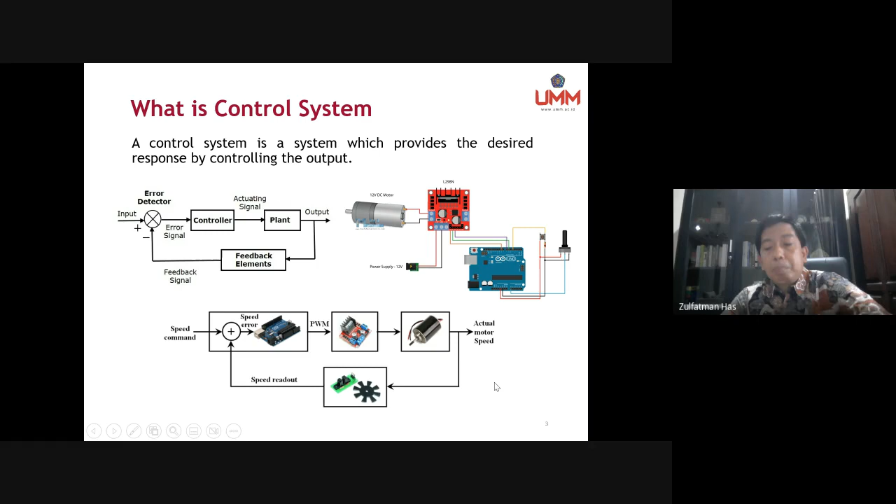And then where we put the controller, we put it inside the Arduino here, and then we can use any type of controller here to make the performance of the DC motors better and better, depending on our requirement. So okay, now after we understand the concept of the principle of the control system, maybe we can review the elements of the control system.

So the difference will be the error. We call it the actuating signal. So the actuating signal is a signal given to the controller to give an action. For example, if the error is high, the controller will push to give its best performance, and then when the error is smaller, the controller will work a little bit not as fast as before when the error was quite big.

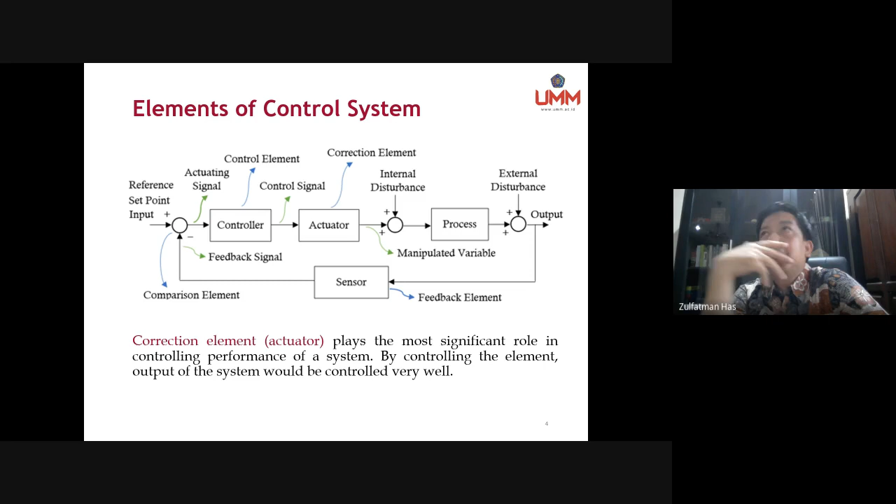For example, if we are trying to control temperature in a room, what is the correction element? The correction element is normally a motor that we put inside the room that controls the room, and the actuator can turn at maximum speed or proportionally change depending on the condition of the temperature. So the correction element will be active depending on the control signal. Meaning that we will give the maximum control signal when the error is maximum.

So the actuation given by the actuator will depend on the condition of the output. So in this concept of control system, we understand that the correction element plays the most significant role in controlling the performance of a system. Meaning that in any application, actually we control the actuator first before we control all the process.

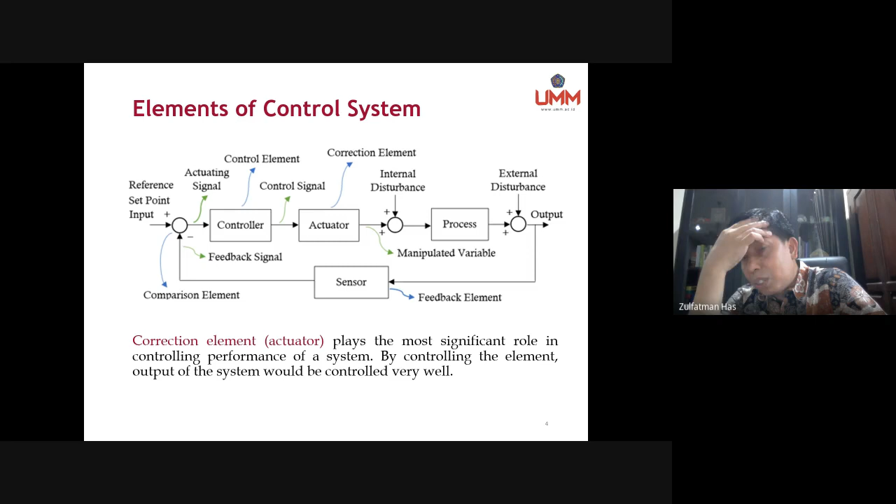So in any application, we can check on the internet, we can see any application for control systems. Normally we control the actuator, we control the correction element, because the correction element is the element that can influence the process, depending on the output of the process. So if you want to design a control system, mostly we will control the actuator to control all the process of the system.

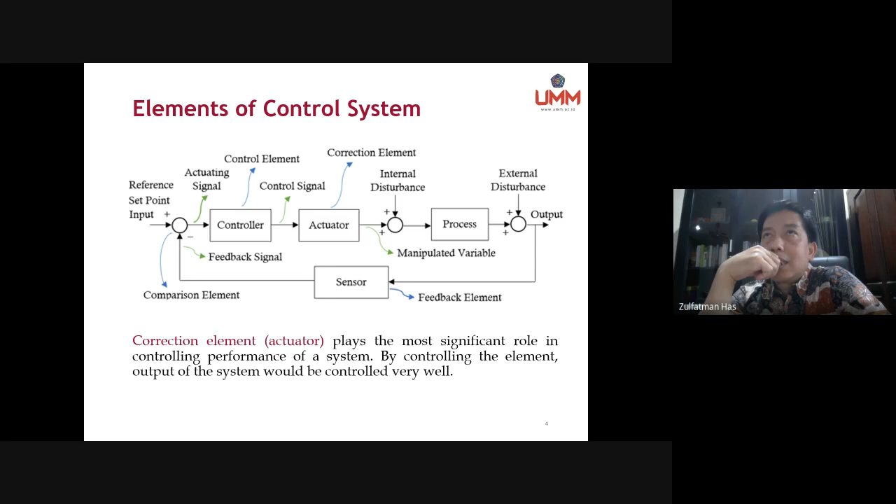Here also we can find internal disturbance, which normally exists in the system, and also external disturbance. For example, if we control the temperature of a room, the temperature in the room will be influenced by the outside temperature, meaning that the outside temperature is an external disturbance.

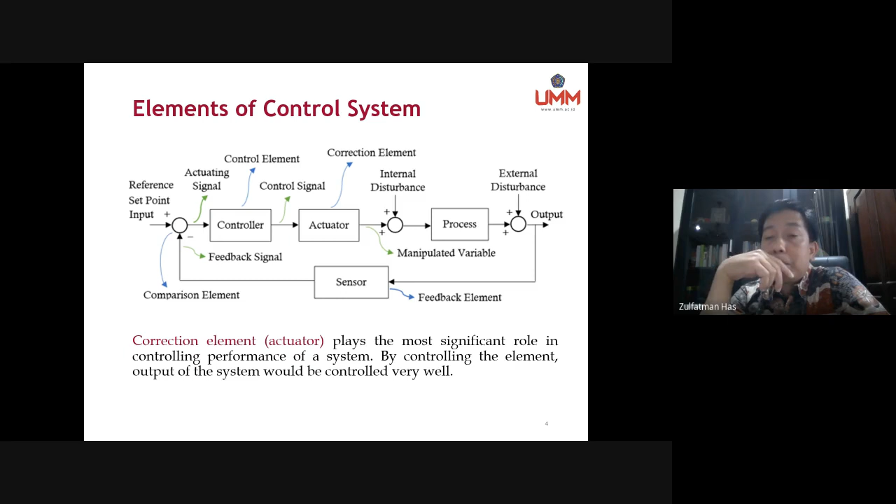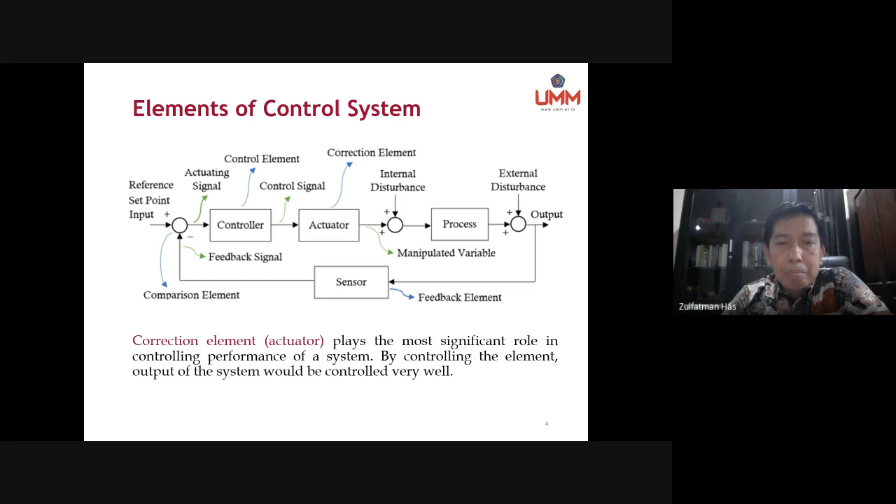The internal disturbance is a disturbance that can exist inside the system, that can be any equipment inside the system, or other parameters that can change in the system. So this internal disturbance comes from the internal of the system. So okay, I think we already understand this concept. Then based on this, we will define some main actuators in the control system.

If we look at the applications, we normally find a servo motor. The servo motor is a very popular actuator in many application systems. And then in industry, we can easily find a pneumatic system, and also a hydraulic system. And then sometimes we put the valve as part of the actuators normally used in control systems.

However, a valve normally is not an independent actuator, because the valve is normally controlled by another actuator. For example, the movement of the valve can be controlled by a servo motor, sometimes by pneumatic, sometimes by hydraulic, depending on the characteristics of the application. For simple things, normally a servo motor can handle the valve, but for high power applications, maybe we need hydraulic to move the valve.

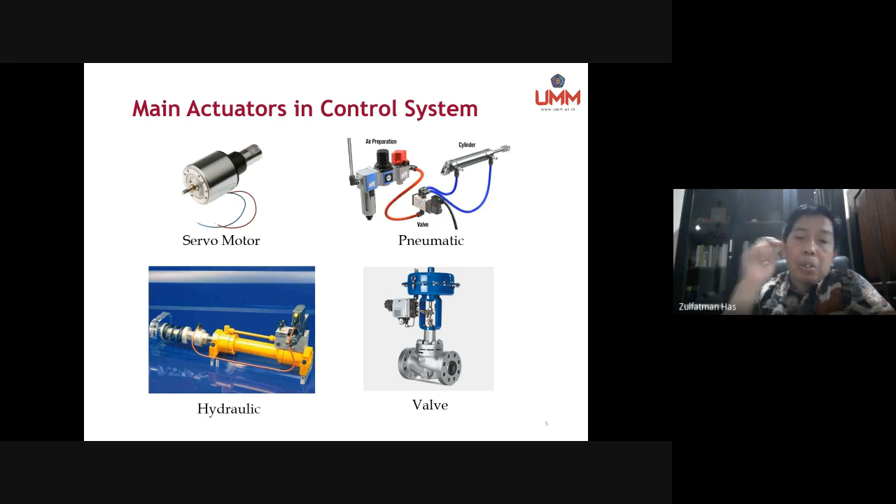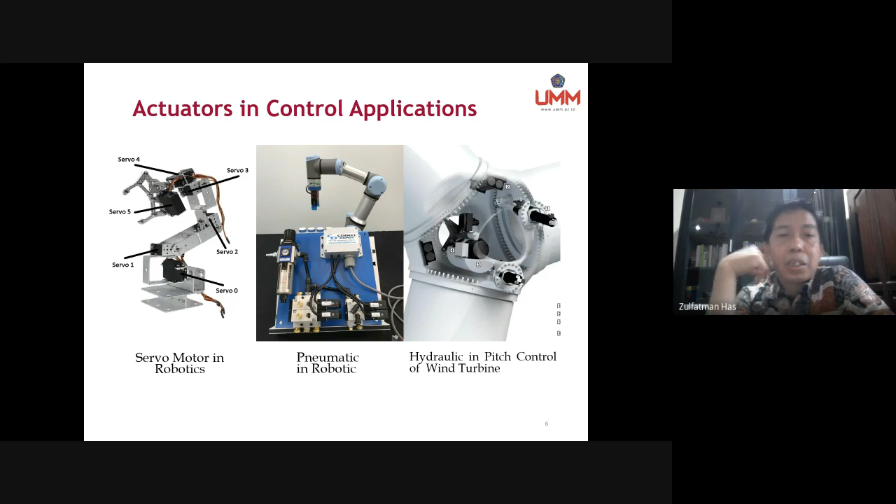Now we might need to ask why we need a control system. In any control process, maybe we only do three things.

First, we make sure that the transient response performance of the system is better, meaning a lower overshoot, or maybe without overshoot, then faster settling time, and faster rise time, for example. These are the three main parameters of transient response we need to adjust before we get the best performance from a system.

And then the second is accurate tracking. Accurate tracking means we have to find as small as possible steady state error. Normally, when we look at the response of the system, after we find the best transient response, we will check if the steady state error is enough, or if we need to get a smaller steady state error for the system.

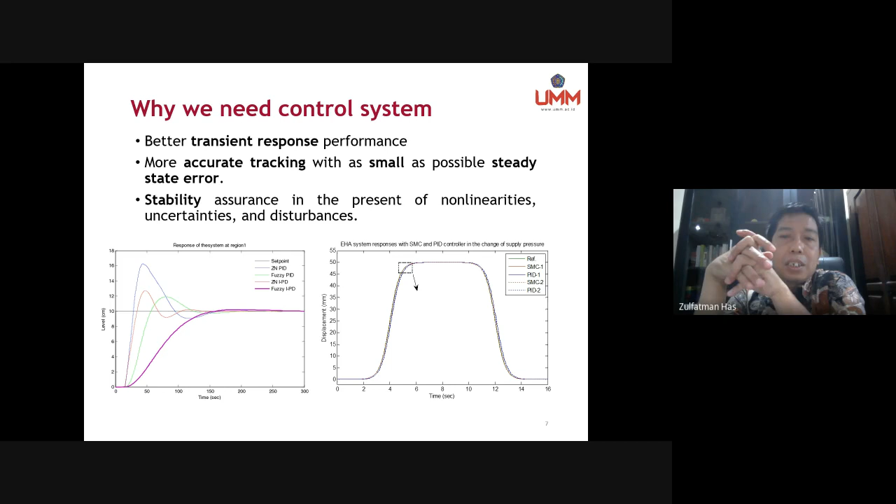But sometimes we also have conditions where we don't need to apply one of them, because we think the parameters are already enough. For example, maybe we try a lead compensator for the system, so we only find the best transient response for the system. Then we look at the steady state error, or accurate tracking error, and if it's already good enough, we don't need to design further to adjust the steady state of the system.

Then we only continue for stability, because stability normally needs to be ensured when the system faces some disturbance or uncertainties during operation. For example, for a highly nonlinear system, such as a hydraulic system - hydraulic systems are very highly nonlinear - when the system is running, sometimes some parameters change, or we find some nonlinearities there, for example friction or something else.

So maybe the performance of the system will be changing, so it will be lower. So we have to maintain the condition of the system, because the system may not be stable and may move from the steady state condition to somewhere else, so the error will increase.

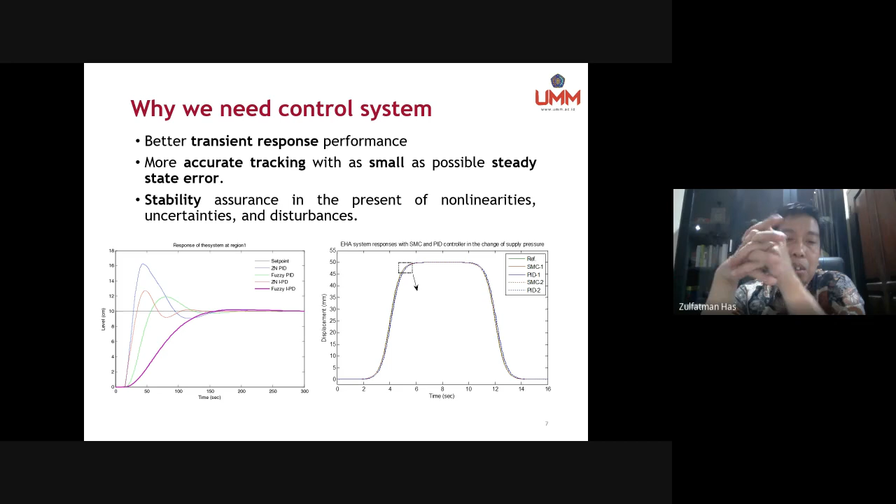The system will get a problem, and if we apply the system to an application, we will get trouble for the application. So from the last slide, maybe we can think about what is the challenge for the control system?

First is nonlinearities. Nonlinearities is the main problem for the system, because sometimes we face a system, for example, a hydraulic system. Hydraulic systems are normally highly nonlinear, because some parameters are changing, and we can find friction. When we run the hydraulic system for a certain time, the condition of the oil will change, so it cannot push the piston as good as before, meaning the stiffness of the hydraulic piston will change. So this is the challenge for the control designer to find a solution for the nonlinearities problem.

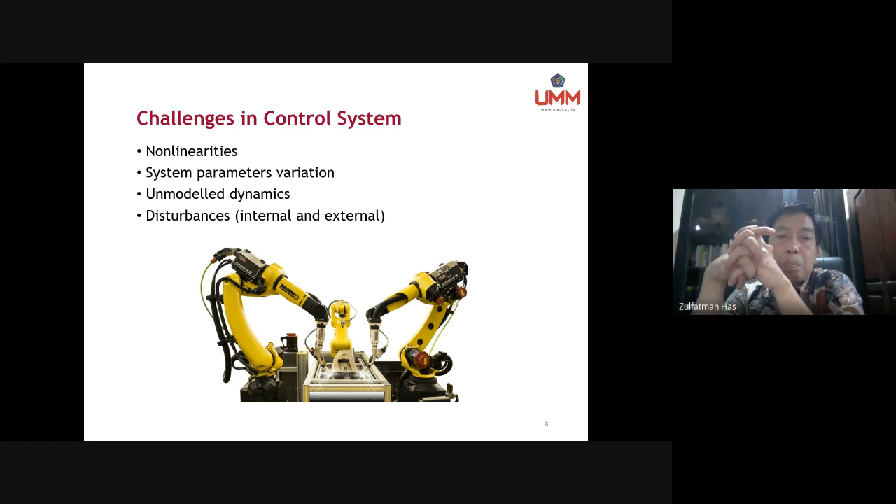Then the last one is disturbance. Disturbance can be internal or external. Disturbance also greatly influences the performance of the system, so we have to fix the disturbance. In control theory, we have found some formulas and concepts that can cancel out the disturbance, so that when the system faces the disturbance, it is not affected by it. I will show you later on how we cancel out the disturbance, such that it does not affect the performance of the system.

What is the main issue in control system? The first is about modeling. Why modeling? Modeling means we try to transform the real system into a model, and sometimes we get a problem during modeling, meaning that if it's a simple system, there's still no problem, but when the system is highly nonlinear, we have a problem for the model.

Why? Because when we try to compare the result of the real system and the model, we may find a large difference between both of them, because some parameters, nonlinearities, or other uncertainties and unmodeled dynamics cannot be put into the model. So we have to create a very precise model for the system to make sure every part of the system is already inside our model.

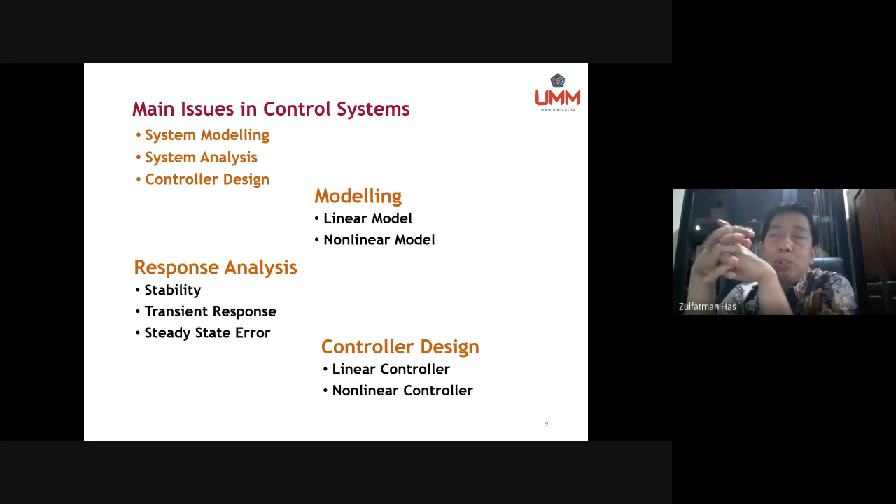Maybe we can try to model the motor, run it in a closed loop system, and compare the system with the same input, then look at the output. We compare the output between the real system and the model. For a simple system, maybe the difference is not too big, but for a system influenced by nonlinearity or uncertainty and so on, maybe the difference will be very big.

So during the modeling, maybe we need to model the system to get the best model for it. I've done this many times in experiments, also in simulation by MATLAB, for example with DC motors, pneumatic systems, or hydraulic systems.

I'm trying to compare the results. For the DC motor, the difference is not too big, but for the pneumatic and hydraulic systems, the difference between the output of the model and the real system is very big, because there may be a simplification in the model, and we need to develop our model and put some nonlinearities or uncertainties inside it.

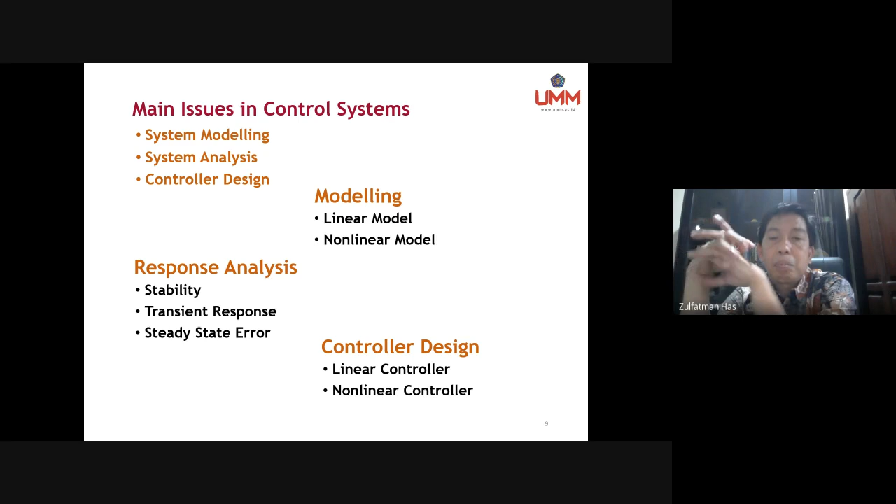Okay, I will continue with this. It's about types of control in control systems. Normally, we find linear control. Maybe you have already learned about PID control. Maybe next semester you will continue with pole placement, LQR, LQG, maybe other types of linear control.

In nonlinear control, maybe it's advanced control we normally learn. It's about H-infinity, that's only an example, okay? There is sliding mode control. There is backstepping, and so on.

And then intelligent control, normally we find fuzzy control, and then there is neural network. Sometimes we combine fuzzy logic and neural network together, for example ANFIS, that is what we call hybrid intelligent control. Sometimes we combine linear control and intelligent control, or sometimes nonlinear control and intelligent control.

Another part, normally we also apply adaptive control. Adaptive control means our controller, which can be linear or nonlinear, will adapt to the condition of the system, not only from the error but also other parameters, so the system will improve its performance better than if we only use nonlinear control.

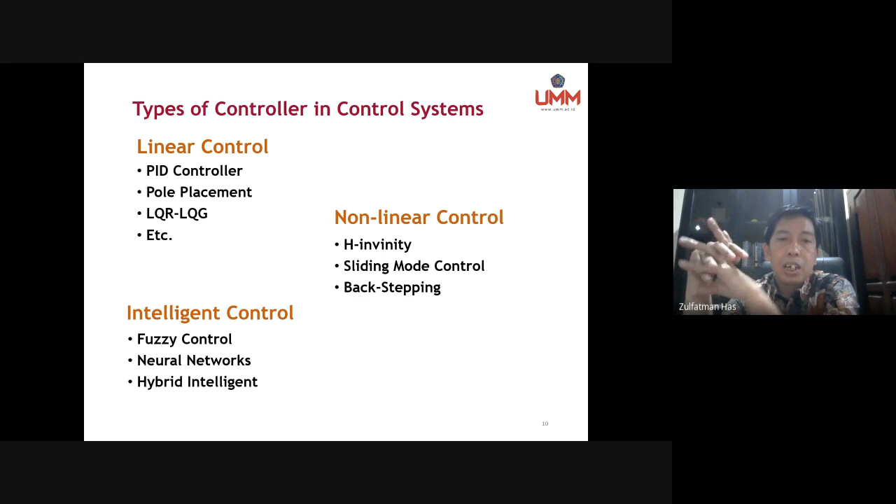So this is normally the type of controller we can find in any application, but these types of controllers are always changing and being developed based on the research done by researchers around the world, depending on the application.

Okay, this is the main part I want to share with you: how we design a control system. We normally work not only on modeling the system and simulating it in MATLAB, but sometimes we need to apply the proposed control to the real system. So why do we need to understand the steps in control system design?

I did this many times in my research, because my research is normally not only based on the model, where I try to create a control design, a control scheme for the model, but also trying to apply the proposed control to the real system.

We can see here, we can start from the modeling, how we model the system from its physical system. And then we can find two types of modeling there. You have done it, I think. We can find the model in transfer function form, and then also we can make it in state space model.

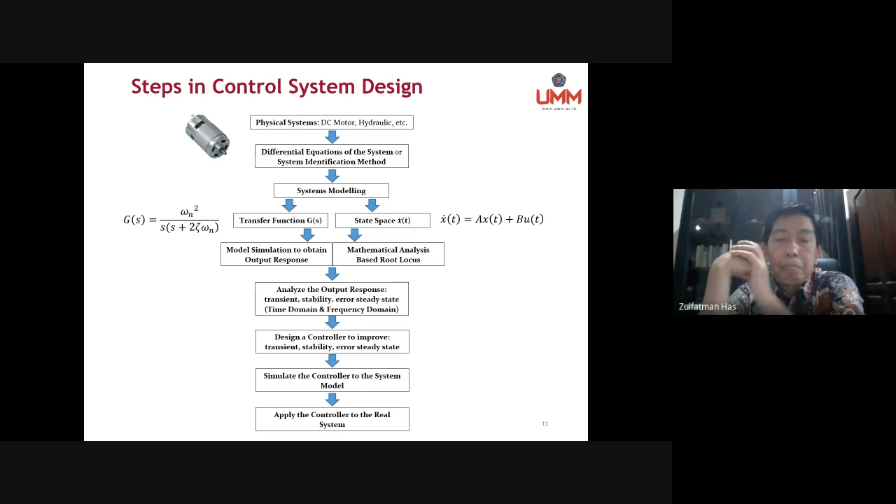Okay. After we find the model, transfer function or state space model, we need to simulate the system. Model simulation to obtain output response, and then we can do some analytical analysis for the response of the system to decide what type of control we want to apply for the system.

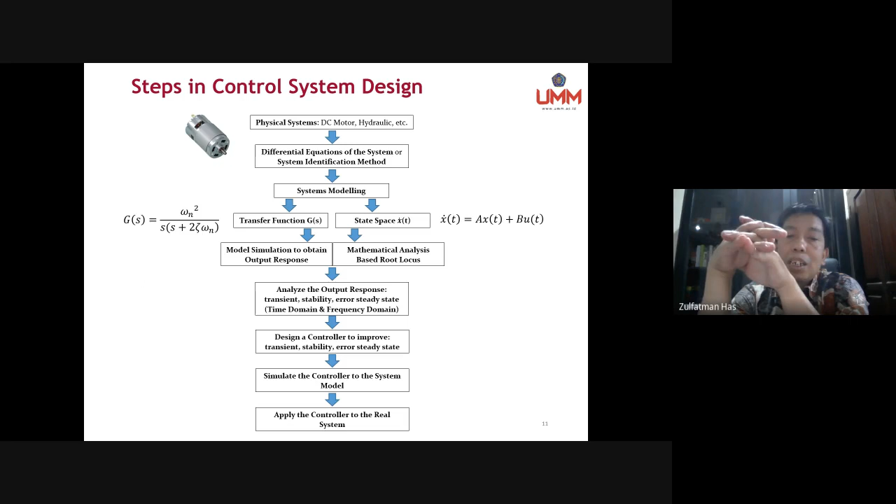So based on the simulation of the model, we can see if the system is nonlinear. I mean, we can see from the parameters there, stability or transient response, or depending on the steady state error. We can decide if the best control system for the system is using a non-linear controller or linear controller. So this analysis is very important for us to decide the controller.

So for this part, we analyze the output response from the model. We can see the transient response, stability, or steady state error of the system. We can use it in time domain or frequency domain. I think in the middle of the semester you already did this, how to analyze the response of the system based on time domain or frequency domain. You can use a Bode plot or root locus or something, depending on the type of response you analyze.

Okay. After this, what we want to do is design a controller to improve the system based on three parameters: transient, stability, and steady state error. So during the analysis, maybe we can see that the settling time is maybe 4 seconds. We want to improve it to 2 seconds, or maybe during the analysis we find that the stability of the system is quite weak. For example, it's close to 0. It can almost become unstable when we adjust or we get some

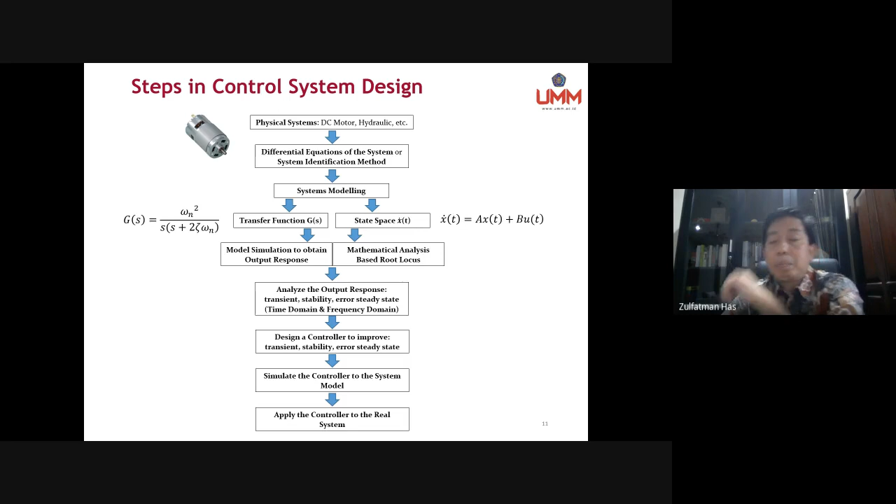disturbance to the system. So we make sure that the stability of the system can be guaranteed, and then the steady state error of the system also can be reduced from the previous value. So the control design is based on the condition of the system found during the analysis of the output response.

Okay. After we design the controller, I think you have done it for the PID controller, then we try to simulate the controller with the system. If we see that the simulation result is good enough, I mean that the controller that we use in the system is good enough to improve the transient, stability, or steady state of our system, we can decide to apply the controller to the real system.

The problem is, what if the control system is not as good as we expect? So we need to adjust the controller to be better and better. This step we can also do while we model the system. For example, when we find a model of the system, we try to simulate the model in MATLAB, and then we try to validate the model response with the response from the real system, and compare them together,

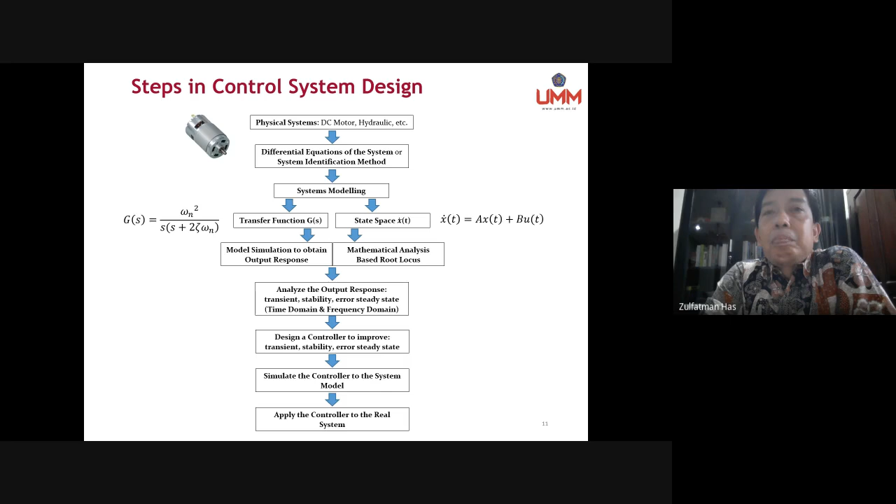Maybe when we apply the model to the real system, we will find a big difference; the response will be different compared to what we found in the simulation. For a control engineer, I think it's a big challenge how we can apply our control design to a real system. So in research, sometimes I cannot be sure whether the result is okay or not when a researcher only applies it to the model.

For example, when I'm reviewing a journal, I will try to look at whether the control system is also applied in the real system or not. If the control is only in simulation, I'm not sure whether it's true or not. So if they give verification that the controller is already applied to the real system, even if the result is not really the same and there is a small difference, it is still okay to validate that the control is good.

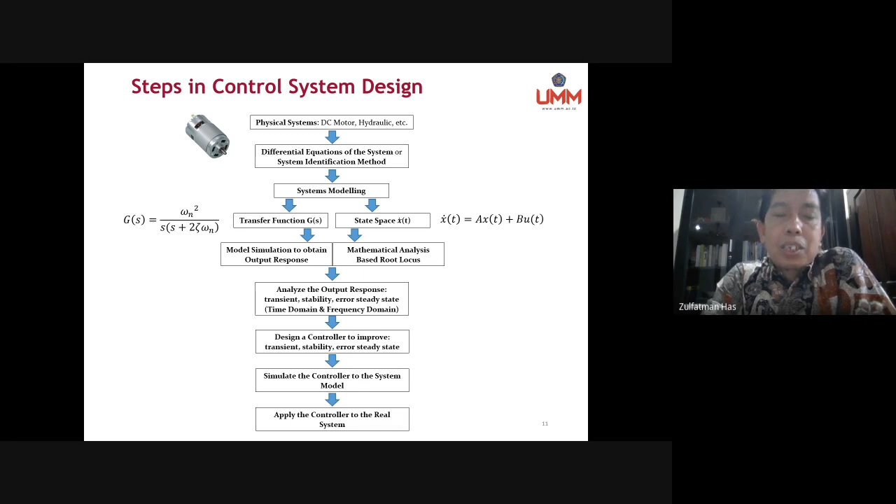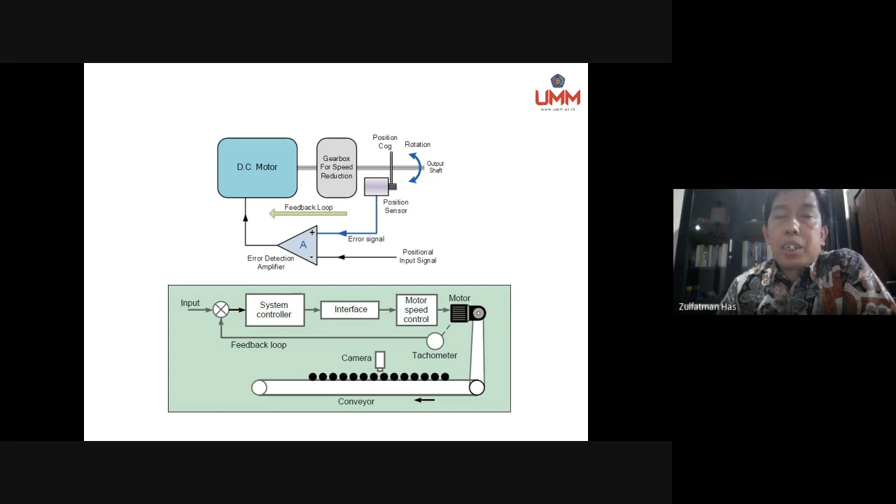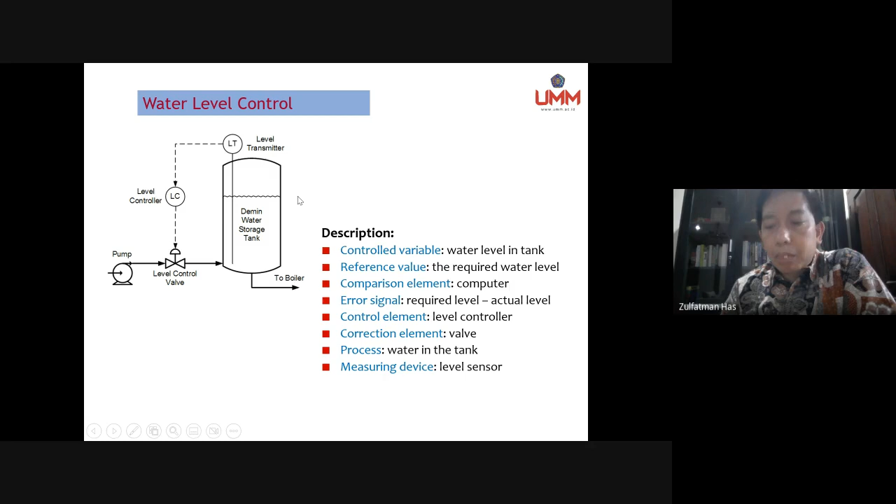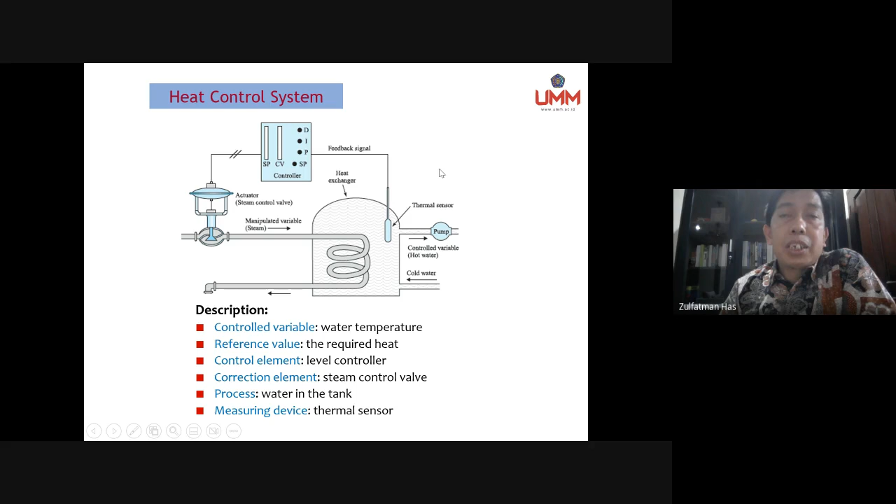But sometimes the tank will be influenced by outside conditions, for example, the outside temperature. I mean, the temperature during the day or at night will be different, influencing the condition of the water. So the actuator can be controlled to follow the change of the weather outside the tank. So any application can be applied here to make sure that the water inside the tank is constant.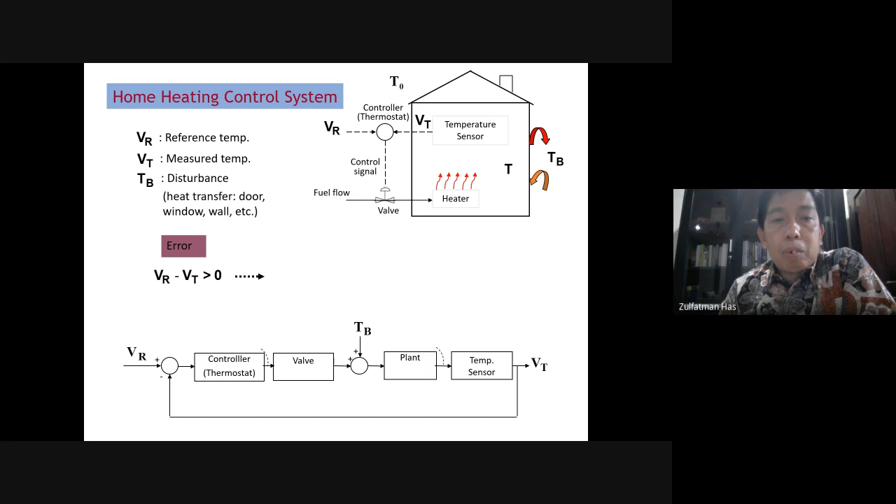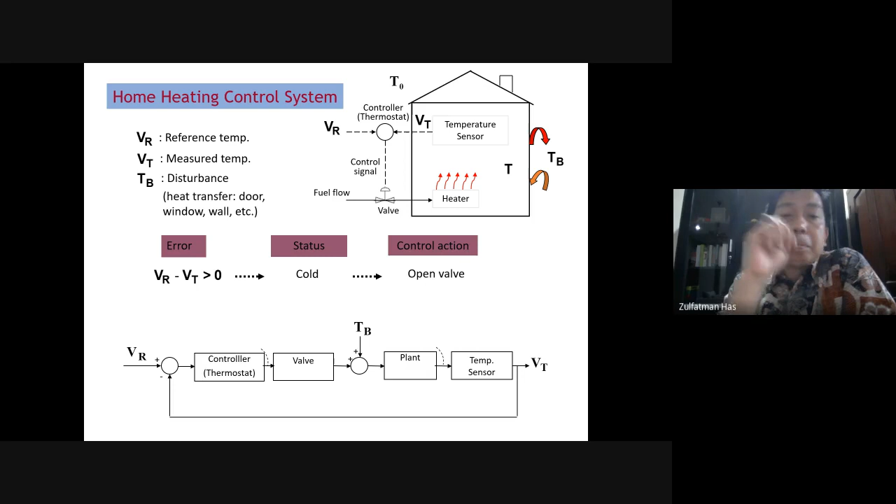What type of actuator do we control? The type of actuator we control is a valve, almost the same as the previous example. We are trying to control the valve to make sure that the temperature inside the room depends on our requirement. For example, if you want only 20 degrees Celsius, the heater will be working to make sure that the temperature meets the requirement. Okay. What is the actuator? As I said before, the actuator is a valve.

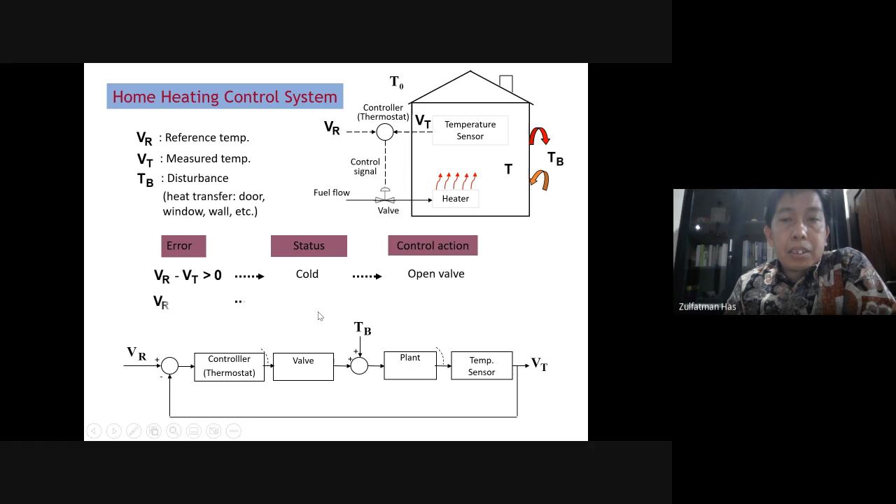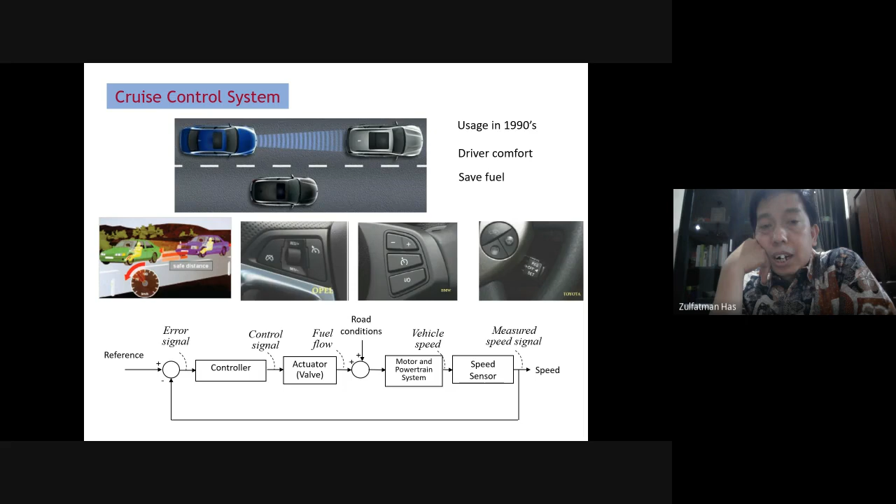So to make sure the fuel flow is controllable, the valve of the fuel flow will be controlled by a controller. So when we control the fuel, the vehicle speed can be controlled, and the speed will remain, and that affects the distance to another car in front of or behind the car. Okay, this is a simple one.

I'm trying to give you an example of some research here. I will go faster here. I did it during my PhD. It's about how to control a hydraulic system precisely by using this test bed. We can see here we have to move the piston precisely depending on the reference. Now at the end of the piston, we also give an external disturbance here.

We make a controller to make sure that even if the external disturbance exists, the response of the piston, or the displacement reached by the piston, is not changing. So we're trying to compare with and without external disturbance. We make sure that the piston can still move to the reference distance in the same position.

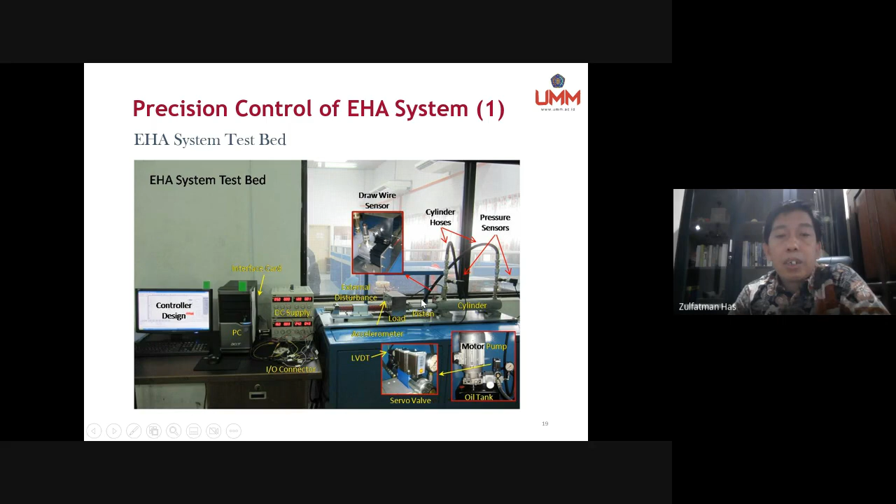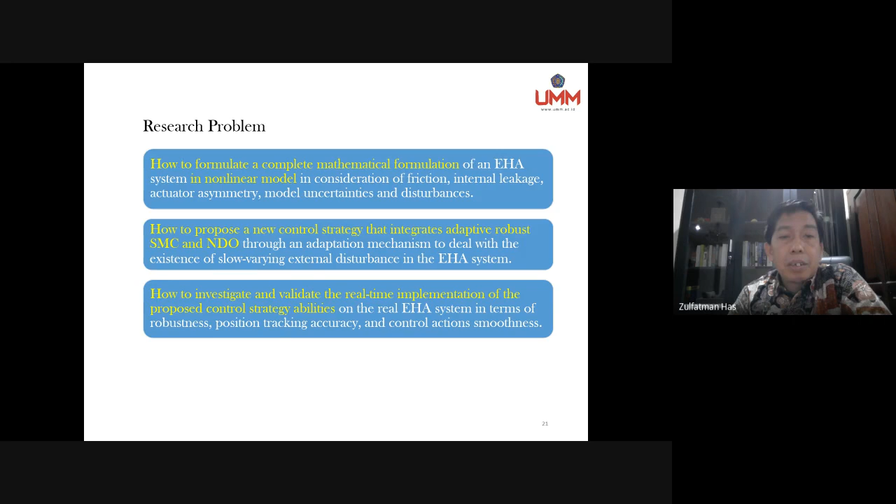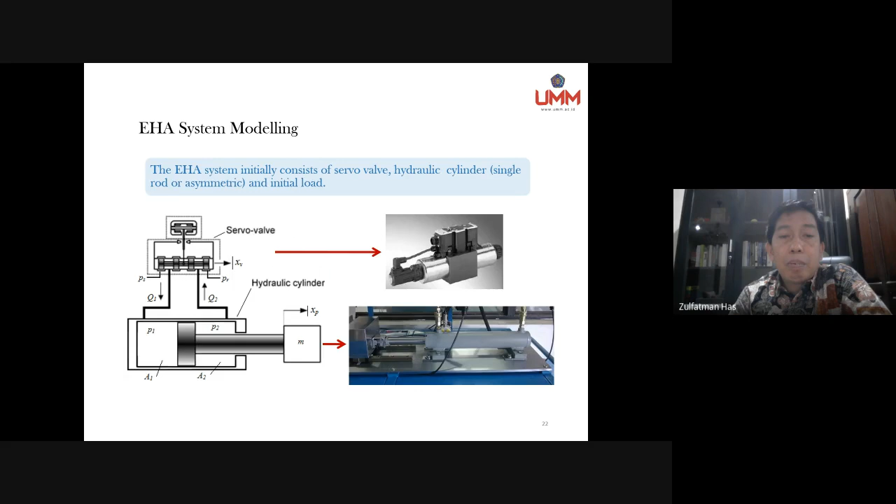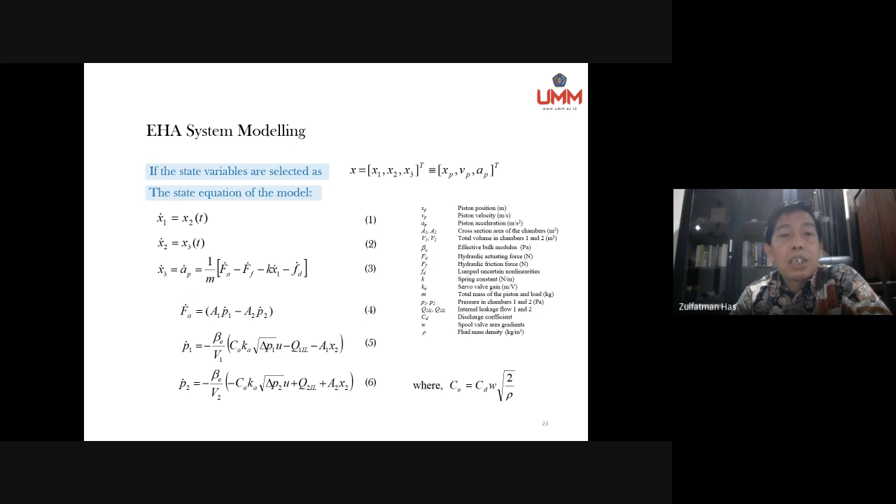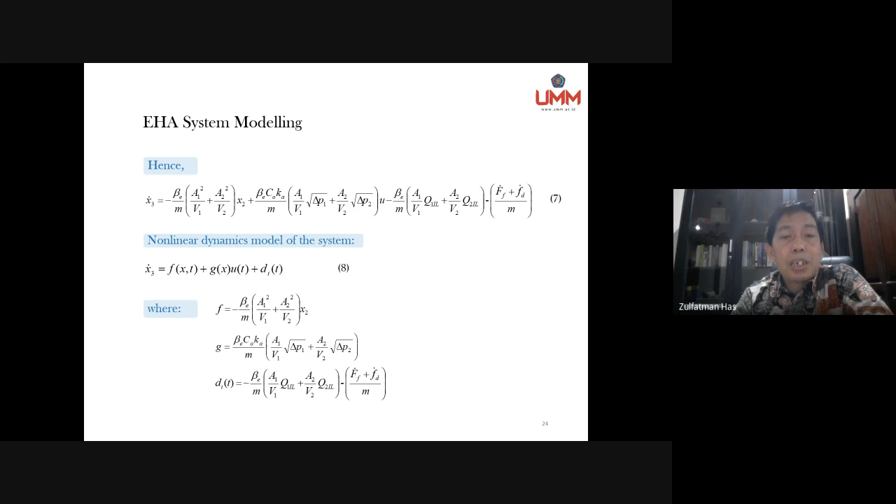Okay, we try to do modeling for the system based on the condition of the system and formulations found in many books, and then we found a model for the system. We define it in 3 states here, x1 dot, x2 dot, and x3 dot, and put some nonlinearities or uncertainties inside the system. We call the model a nonlinear model of the electrohydraulic system. And then we put nonlinear dynamics in the third state, meaning that we ensure the model is nonlinear.

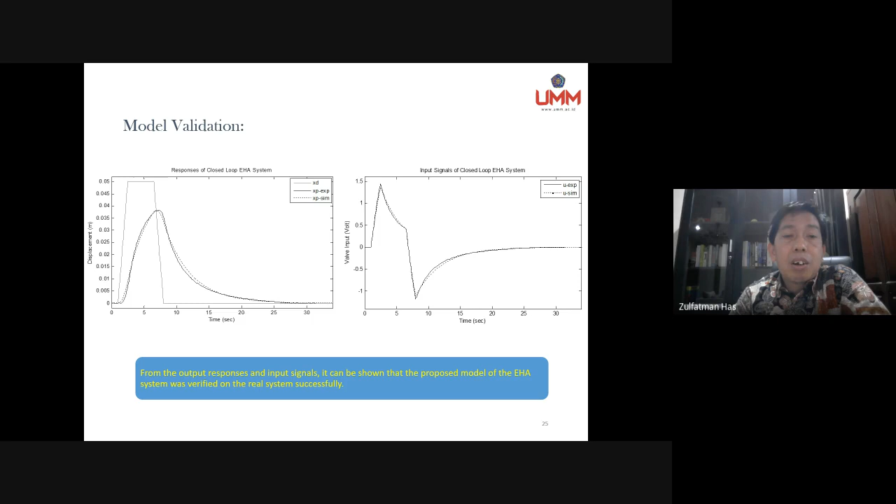This is one step that we have to do when we want to apply the proposed control to the real system. So we start to make sure the model is almost the same as the response of the real system. Okay, this is the proposed control design here.

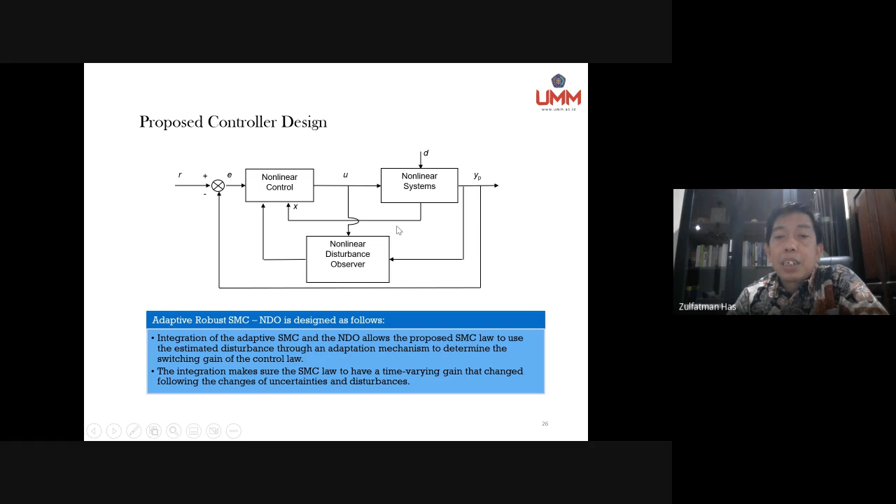We can see here the system is nonlinear. We have already defined or modeled the system as a nonlinear system model, and then we try to design a nonlinear control for the system, and then we put a nonlinear disturbance observer for the system. From the condition of the system, we can see here the nonlinear control of the system will be influenced by the condition of the nonlinear model, meaning that it is a part of adaptation in the scheme of the controller.

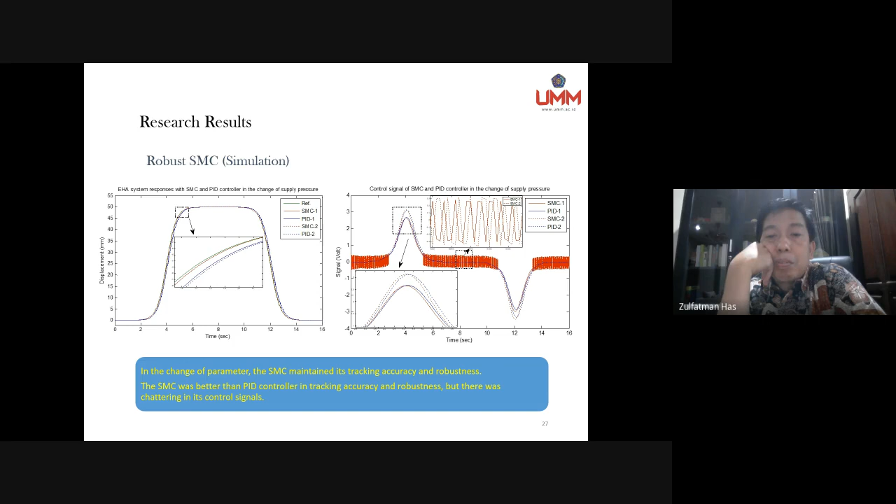Okay, what I find from the system: when we apply the proposed control to the system, we can compare between PID and SMC here. SMC is much better than PID control to solve the problem of the system, meaning that SMC or nonlinear control like SMC gives a better response compared to a PID controller.

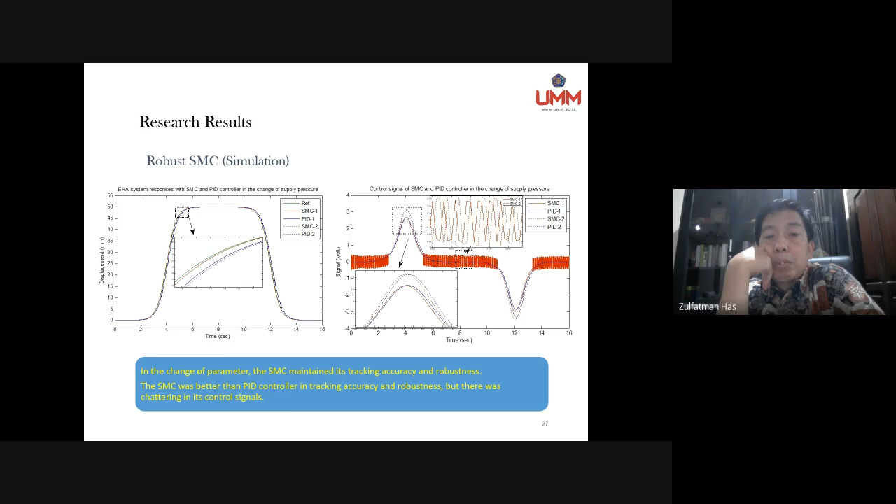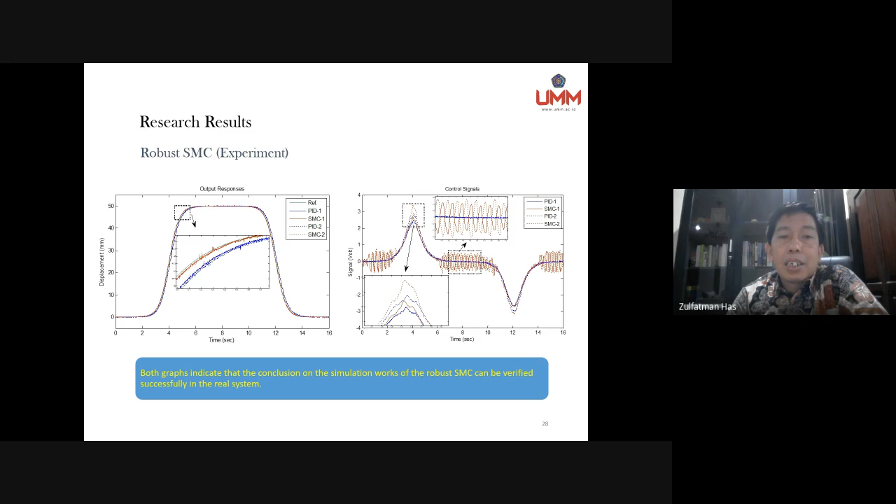Okay, this we can compare. This is a simulation, and this is an experiment. This is almost the same. With the same input, we find almost equal results between simulation and experiment. This verified that when we apply it both to the model and the real system, the proposed control gives almost the same response, meaning that the model is true, and the control system is true. So the proposed control is verified experimentally. Okay.

Okay. The second one is how to control a governor system in a micro hydro system. It is normally how we control water flow in governor control. We make sure that the generator can turn in the same condition to find a constant frequency for the system, even when the load changes. So when the load changes, normally in a micro hydro system, the generator will be slower.

So when the generator gets slower, the governor will open the water bigger to compensate the change of the generator, to make sure the generator's turning returns to its normal frequency. Okay, to make sure of this condition, we need an actuator to make sure the water follows the change of the generator. We use a hydraulic system here.

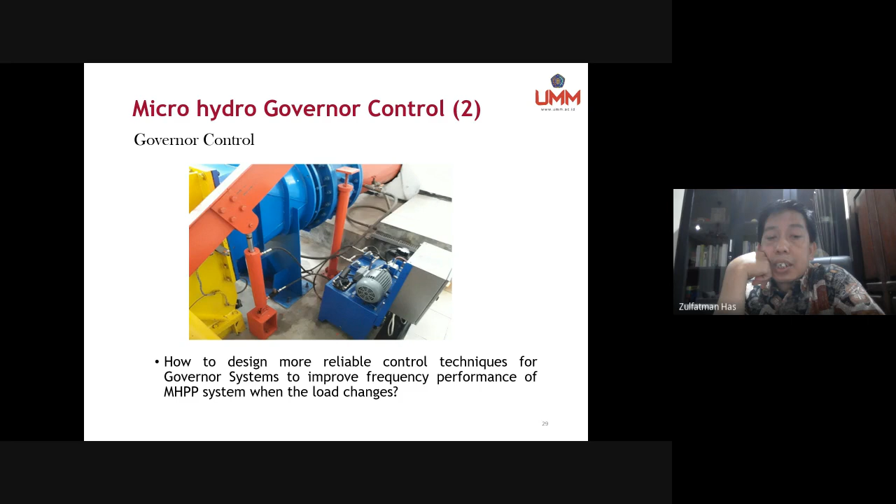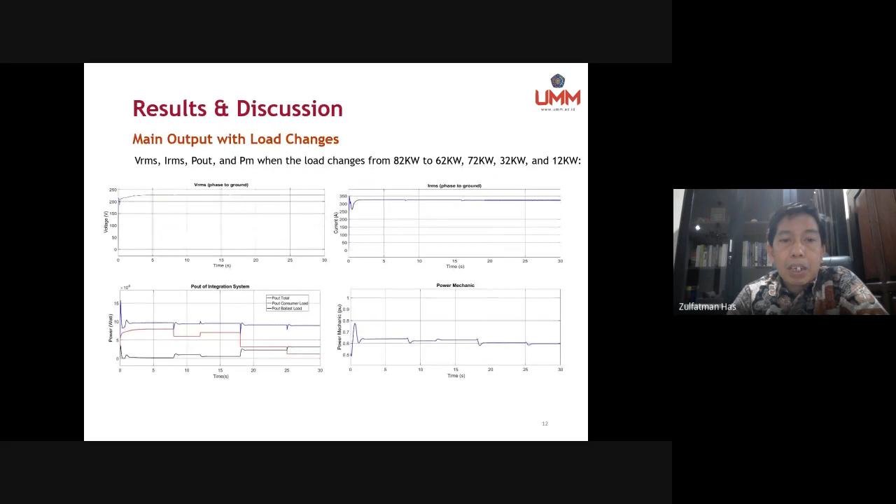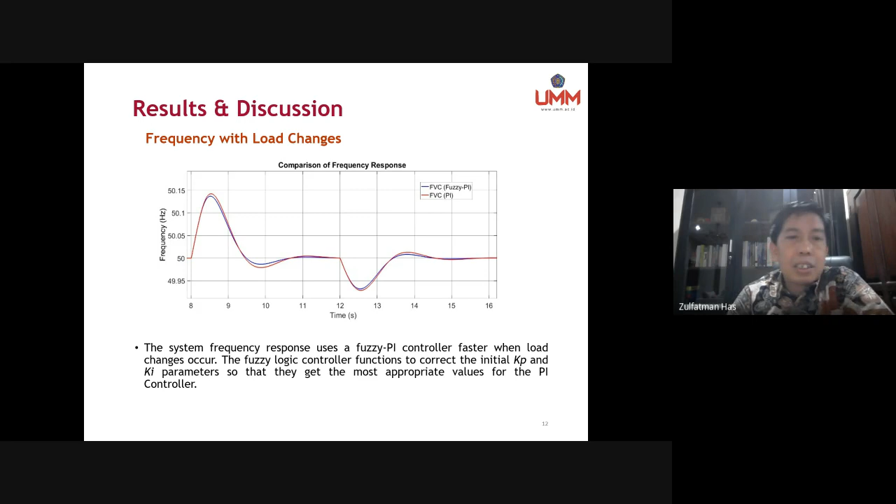Sometimes we apply a servo control here to open and close or proportionally change what we call the gate opening of the micro hydro system. Okay. What we do is we use fuzzy PI here. By using this concept, we can find a better condition of the system. We can see clearly when we compare the frequency. If we apply flow control here, we will find a better result with fuzzy PI here.

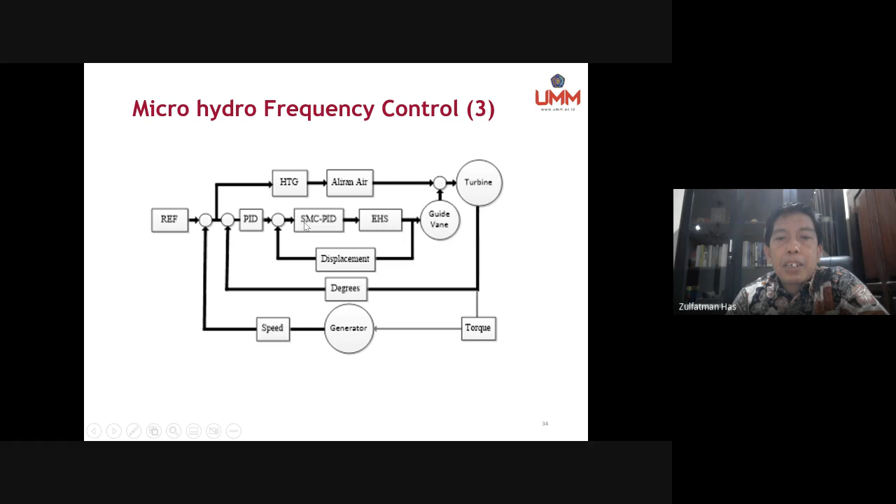Okay, another example. I'm trying to apply SMC PID to micro hydro frequency control here, with the same object. In the second example, I'm using fuzzy PID control. In the third example, I'm trying to apply SMC PID here to control the governor of the system.

Another thing is about wind turbines. A wind turbine has a problem when the direction or speed of the wind is changing. So we have to control. In this example, we're trying to control the blade of the wind turbine. If the speed of the wind is changing, we can control using a pitch control. So here we apply SMC to make sure the actuator in the pitch control of the wind turbine can work precisely depending on the change of wind speed.

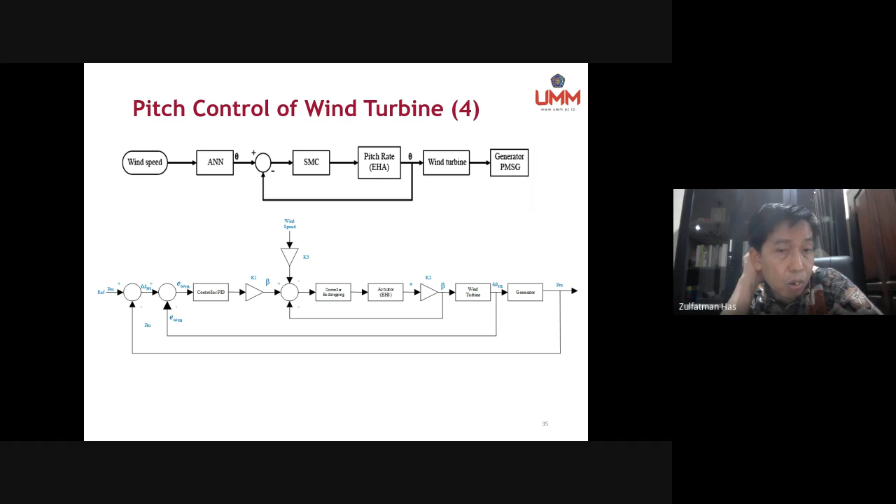The type of actuator used here is a hydraulic system, but in some applications we also find a servo motor as the actuator for the pitch control. In the diagram below, we use backstepping, which is also a nonlinear control, for the actuator. This type of backstepping control also gives a very good result compared to PID. I'm so sorry, in this research I don't put a comparison of the results between a backstepping controller and a normal or simple control like PID.

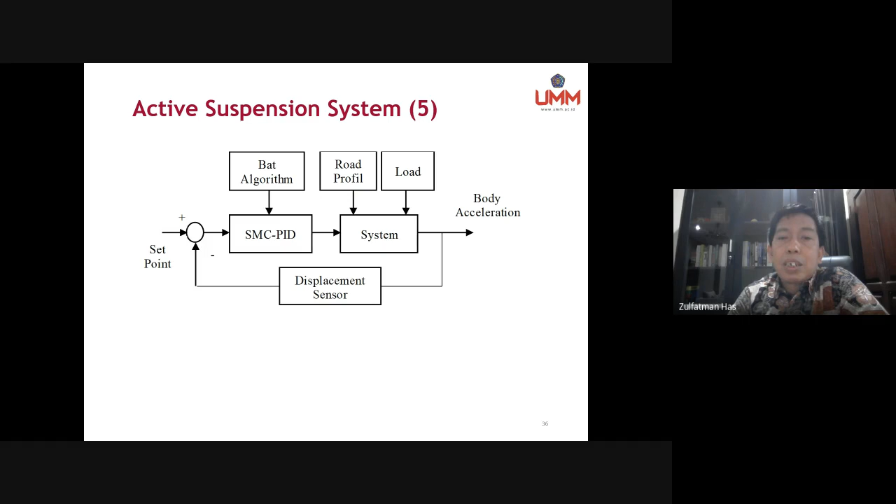Another one is an active suspension system, the suspension system in a car. When we change the load and the road profile is changing, we combine SMC PID as a controller with the Bat algorithm. The Bat algorithm is an optimization computation that we use to find the best parameters for SMC PID to get the best performance. So we optimize the parameters that we give to SMC PID to get the best performance for the system, even when the load and road profile are changing.

Okay, another thing. A simple one is a BLDC and servo motor.

The first one is a BLDC. We're trying to control a BLDC motor here by using SMC PID, and then in the second diagram there, we're trying to control a servo motor using PID SMC.

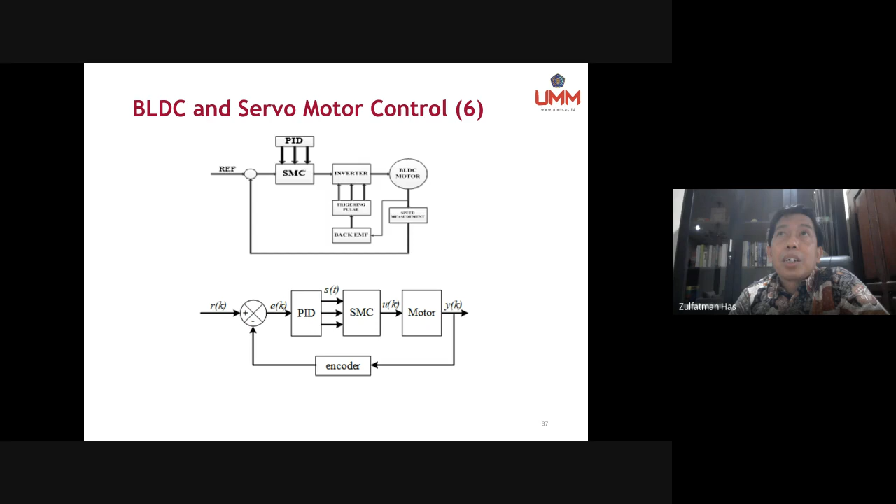In this application, for example, in case of controlling a DC motor, servo motor here, we apply this servo motor to give much more accurate positioning to control what we call PV solar, photovoltaic, yeah, to get the best position to the sun.

I mean, it's like sun tracking, we call it solar tracking. Yeah, solar tracking in two conditions, I mean, we use two-axis control for sun tracking. Yeah, depending on the change of position of the sun. Okay.

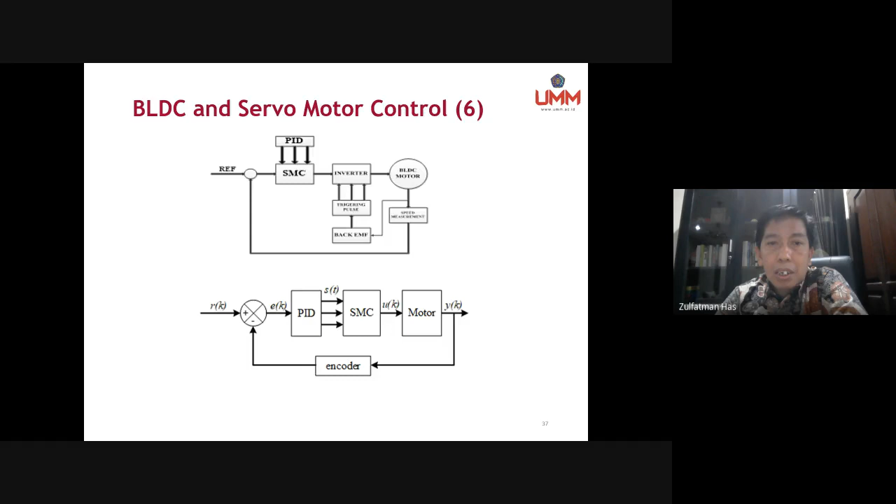Okay, maybe it is too long for you, because I want to give a brief concept in design concept in control system and some applications, maybe it will give you an overview regarding the control engineering system. Thank you very much. Maybe we can continue with question and answer.

Thank you so much, Dr. Zulfatman, for the very clear and informative special lecture about control system engineering. Thanks so much. Do you have any question? You can ask through the microphone and also via the chat box.

A student did a project in order to apply a controller to a system. However, the project was only based on simulation. So I'm really happy that you stressed the actuator, the importance of the actuator in order to do the correction element, in control system. So this is very, very useful information to students.